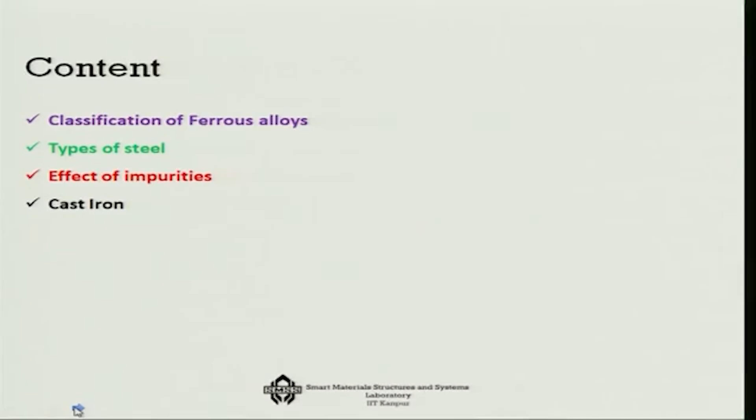Good morning, students. Fortified by the knowledge of crystal structure, now we will start our journey with some materials which show regular crystal structure. We have first chosen the metals in this journey, and among the metals, we are going to first talk about iron and iron alloys. So in this lecture I am going to talk about classification of ferrous alloys, various types of steels, the effect of impurities, and also another iron based alloy which is a composite, not exactly an alloy, which is cast iron. These are the things we are planning to discuss today.

When we talk about metallic alloys, there are two basic classifications. One is the ferrous group, where the base metal is iron, and another is the non-ferrous group, where the base metal can be anything like aluminum, copper, zinc, nickel, titanium, and their alloys. Iron based alloys are much more extensive in terms of use, and have been in use for a very long time. If you remember, I showed you the evolution of materials where iron came first and still has a very large base, mostly because iron is quite abundant on earth. But interestingly, aluminum is more abundant than iron. The problem is that extracting aluminum is a high energy procedure, so energy intensive to get aluminum from the earth's crust, that is why it is relatively less popular than iron and relatively more expensive, even though aluminum is much more abundant in the earth's crust.

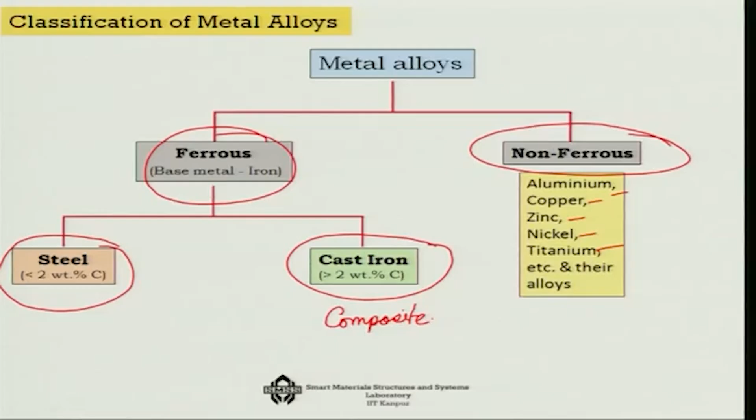Now, in terms of iron based different types of alloys or composites, the broad two things we can say is steel as one of the alloys, and cast iron. I would not exactly call cast iron an alloy, but rather a composite. The logic behind that I will explain when I talk about composites. Basically, in a composite the constituents remain in a distinct phase separation state, they do not chemically get interlinked with each other. That is what happens when the percentage of carbon is so high in a system like iron, that carbon starts to precipitate and they form a composite. On the other hand, steel is a kind of mixing where the carbon atoms penetrate inside the iron crystal structure, and thus not only carbon but similar impurities actually form the alloys.

The journey with iron, as I told you earlier, began about 3000 years ago and it is still continuing today. One of the most important alloying materials in iron is carbon, which forms an interstitial solid solution. What is this interstitial solid solution? First, solid solutions mean both the solute and the solvent are at the solid state itself, in this case the iron and the carbon. Then how do you get the solution? The carbon atoms, which have atomic radius of about 0.071 nanometer, are much smaller than the iron atom, which is about 0.124 nanometer. Now, if you consider an iron crystal structure where these atoms are bigger in size, consider these three atoms, then the space created in between is easily suitable for one carbon atom, and that is the interstitial space.

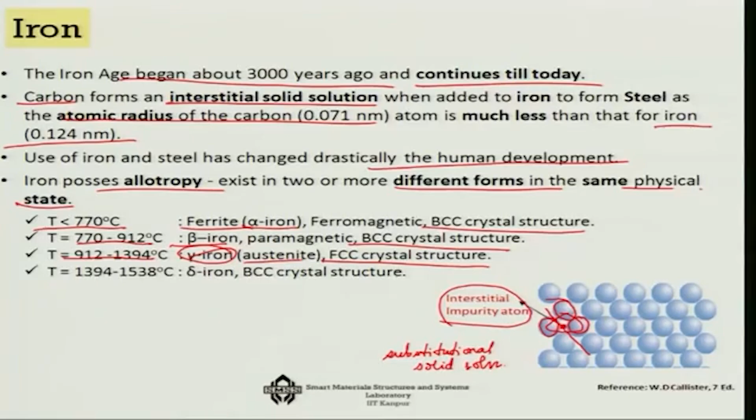If you go from 912 to about 1394, you will get another version which is known as the gamma iron, and this is not BCC anymore, it has an FCC crystal structure, which is also called austenite crystal structure. Again, beyond 1394 to 1538, you get another iron crystal structure in another phase of iron, which is delta iron, and it has a BCC crystal structure.

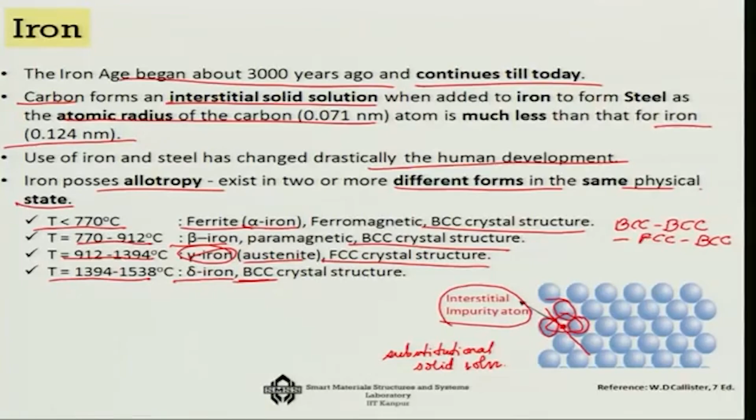So where are we? We start from BCC. Again, at a higher temperature we have BCC, but ferromagnetic to paramagnetic. Then from BCC we go to FCC, and at an even higher temperature we go back to BCC. That is how the alpha, beta, gamma, delta iron phases and the allotropies of iron are actually distributed.

Now, the penetration of carbon, as I told you, into iron had a very significant economic effect. If you look at the crude steel production over the roughly 65 years between 1950 to 2015, from the World Steel Association report of 2016, you would see that about 1621 million tons for 2015, about 50% is from China.

The rest is from the rest of the world, so that is what you can see in this picture: China is there, Japan is there, and other Asian countries are there. Of course, India, from the single biggest player point of view, India has many very good steel makers today in the Indian context. So as you can see, even though there are some ups and downs, by and large this curve is always increasing in terms of million tons of steel per annum.

In fact, we always say that the growth of an economy is very much depicted by the production of iron and steel. So that is something you can see, that is how it is happening.

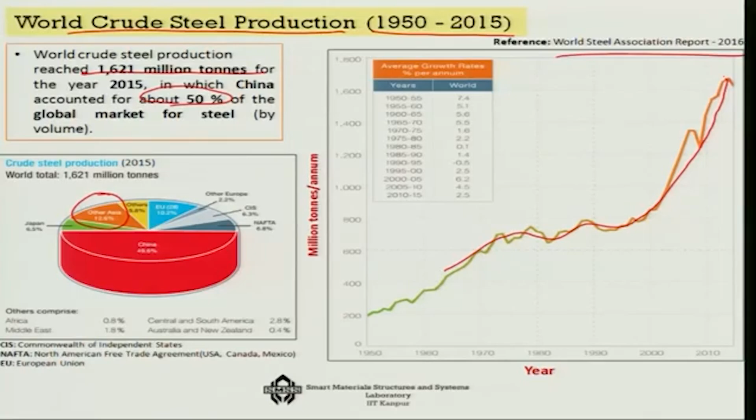In fact, if you look at the picture country-wise, you would see that some of the highest developing countries like China has 803.8 million tons per annum steel production capability, Japan 105.2, and India is number 3 with 89.4. United States is lower than that at 78.8, then Russia, South Korea, Germany, Brazil, Turkey, etc.

In terms of companies also, there is one company which is at the top of the list, Arcelor and Mittal together, where there is an Indian contribution, that is 97.14 million tons. And also if you look at number 10, Tata Steel Group at 26.31 million tons, or SAIL or Jindal, we really have world presence in terms of million tons of steel per annum production.

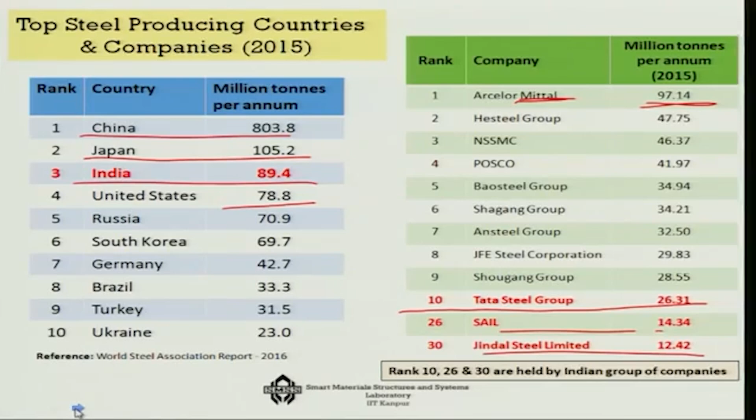So that is why steel is one of the very important materials for our economy. Now, steel we know is a solid solution which has interstitial carbon present in it, but the presence of carbon is smaller, less than 2 weight%. If it becomes more, then we go to the cast iron phase.

So if it is less, then we get steel, but even that itself has many variations. For example, depending on the presence of other alloying elements, if there are less than 10 weight% of other alloying elements, then this carbon and other element composition will make you the low alloy steel. If it is greater than 10 weight%, then we are going to get the high alloy steel.

Now, among the low alloy steel itself, there are 3 different types. One is the low carbon steel, which has less than 0.25 weight% of carbon, then medium 0.25 to 0.6, and high carbon steel 0.6 to 1.4%. Among the high alloy steel, which has greater than 10 weight% of alloying elements, again there are 2 subgroups, one for the tool steel and another for the stainless steel.

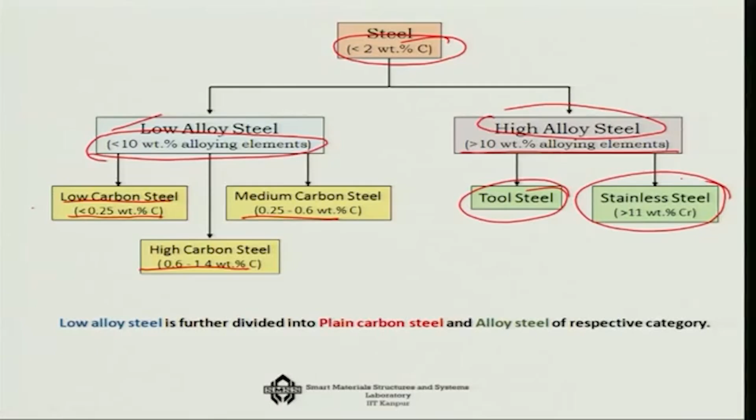Now, stainless steel is very distinctly classified because of the presence of chromium in it.

In fact, greater than 11% presence of chromium gives steel the quality that it will not get corroded very easily at all, and that is how stainless steel gets its name.

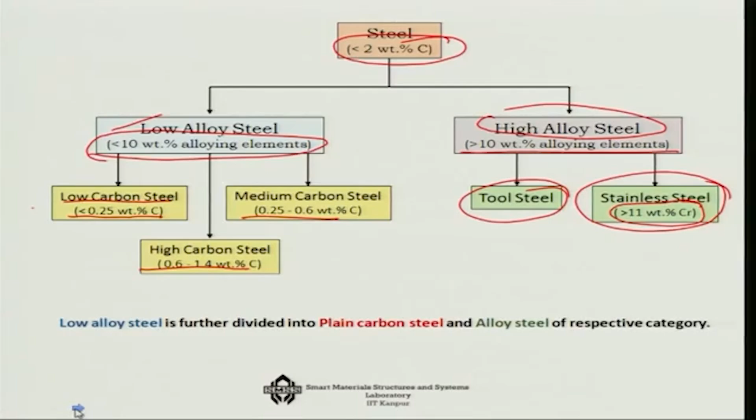Now, when we talk about plain carbon steel, which is one of these low alloy steels, what do we mean by it? There is an AISI definition stating that if you do not specify the minimum content of materials like chromium, cobalt, molybdenum, nickel, titanium, tungsten, vanadium, zirconium, etc., to be added to obtain a desired effect, that would be one qualifying point for plain carbon steel.

Again, copper should not be more than 0.4%. The maximum content is restricted for manganese to 1.65%, silicon to 0.6%, and copper to 0.6%. So copper must be within a range of 0.4 to 0.6%, manganese should not be more than 1.65 weight%, and silicon should not be more than 0.6 weight%. The rest of the materials should be present, but the minimum content is not specified. In such cases, we consider these to be plain carbon steel.

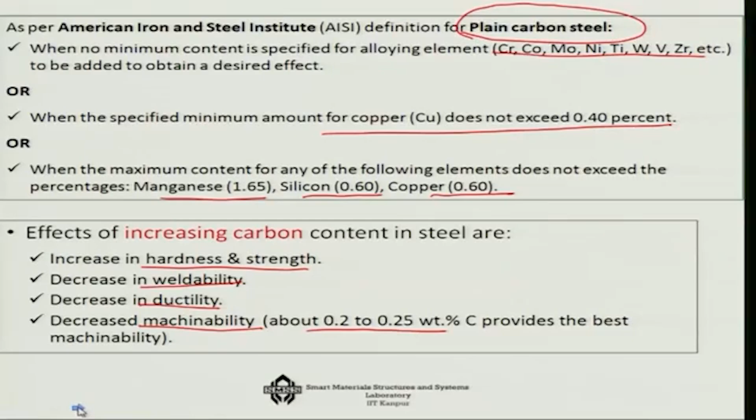So there is a trade-off, which guides us towards exactly how much is good enough for a particular product. The most versatile among steels is low carbon steel, which contains less than about 0.25% carbon. Because the carbon percentage is low, it is relatively soft and also weak.

It has ductility of about 25% and good toughness. It also has good machinability and weldability, and is less expensive to produce. Its tensile strength is of the order of 415 to 550 megapascal. Low carbon steel is used for general applications where strength is not of high demand, and this is generally known as mild steel.

There is a version called low alloy steel, which gives better strength, up to 700 MPa, and in this you get more alloying elements, for example copper, vanadium, nickel, molybdenum up to 10%. More than that it becomes high alloy steel. This low alloy steel has better tensile strength and many structural applications like beams, channels, nuts and bolts, wires, tin cans, etc.

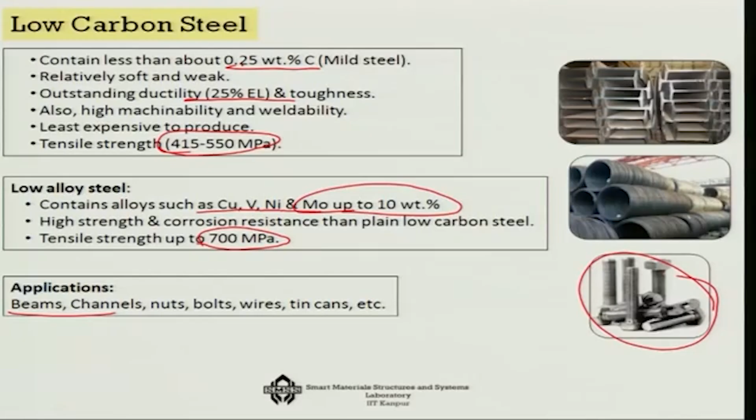So that is about low carbon steel. Now, if the carbon content increases a little more, to 0.25 to 0.6%, we get medium carbon steel. These are stronger than low carbon steel, so strength has increased, but with lower ductility and toughness.

You have sacrificed in terms of ductility, but it has good wear resistance; strength has increased, with tensile strength up to 850 megapascal for plain carbon, and if alloyed further you can go up to 1900 megapascal. No wonder it has heavy duty applications like railway wheels, tracks, gears, or crankshafts — wherever you need high tensile strength and toughness, that is what you get in medium carbon steel.

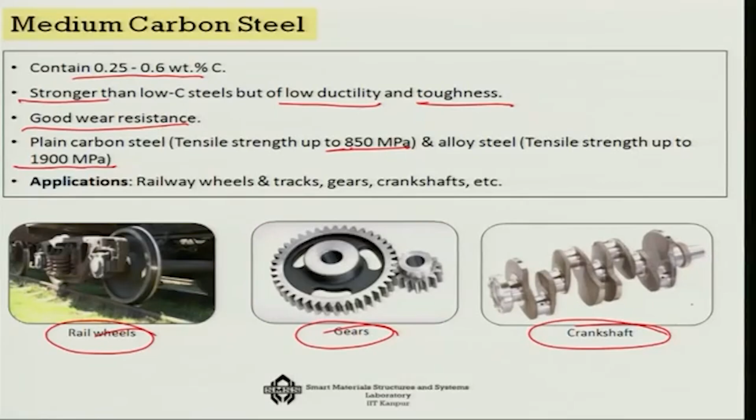Now, finally, if we increase the carbon further, from 0.6 to 1.4%, this is the hardest, strongest, but least ductile carbon steel. That is why it is generally used for dies, for example, or this type of application.

It can be further alloyed with carbon and other metals to form very hard and wear resistant material. If you alloy it with chromium, nickel, tungsten, molybdenum, or vanadium, you get something with better wear resistance, which can be used for cutting tools, embossing dies, saws, concrete drills — this type of high strength application.

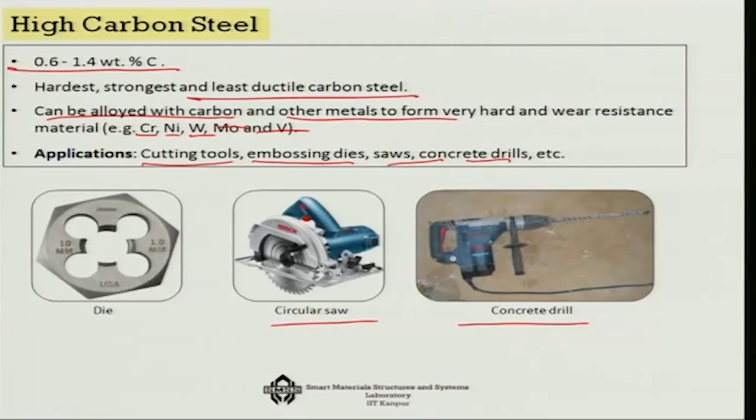Now, so far we kept our alloy percentage less than 10%. We only varied the carbon percentage, from low carbon to medium carbon to high carbon.

If the alloy percentage itself increases, goes to greater than 10%, for example for drill bits and other rotating cutting tools, you can withstand higher temperature without losing hardness and toughness. For example, the high speed steel like 18-4-1, that means it has 18% tungsten, 4% chromium, 1% vanadium, and a carbon content of about 0.6 to 0.7. So how much weight percent are we getting? Something like 18 plus 4, 22, 23... 23.7%, greater than 10 weight percent of alloys. You get a very good quality high alloy steel which can be used for tools.

Cobalt high speed steel is another example, used for increased heat resistance. Or molybdenum HSS, where the molybdenum will increase the hardness and wear resistance, and also become cost effective because you are replacing tungsten in the tool steel. So all these high alloy steels are mostly used as cutting tools and drill bits.

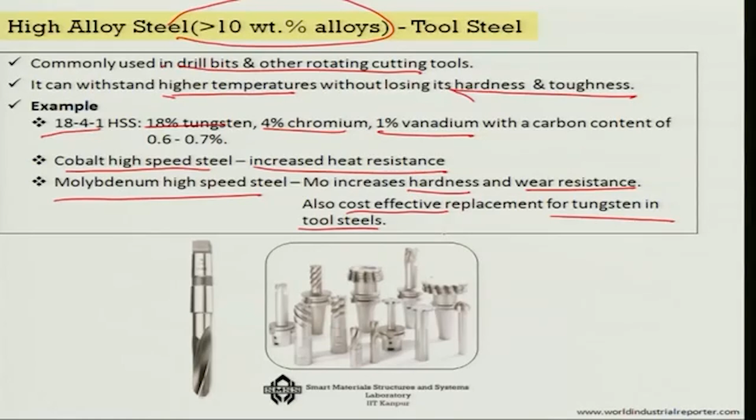Now there is another group of high alloy steel which also has greater than 10 weight percent of alloying material, but it has a single most important alloying material, that's why it's a separate class - chromium, at least 11 weight percent. The presence of chromium gives it high resistance to corrosion. For example, the 18 by 8 stainless steel has 18% chromium and 8% nickel, giving it very high resistance to corrosion.

That is why they are applied for applications like cryogenic vessels, food processing, gas turbines, high temperature steam boilers, heat treating furnaces, nuclear power generating units, and various other types of boilers. So that is about stainless steel.

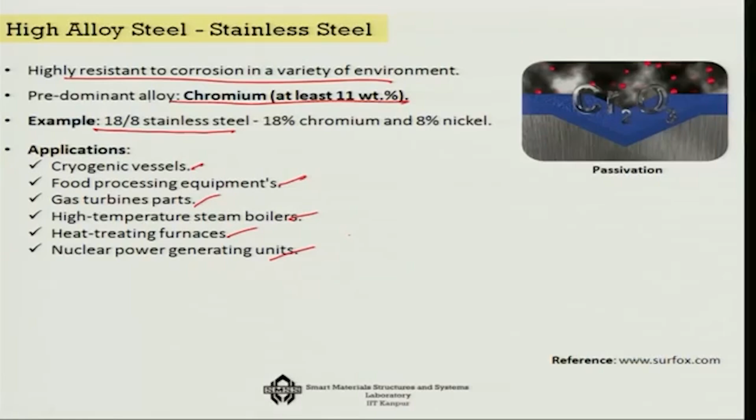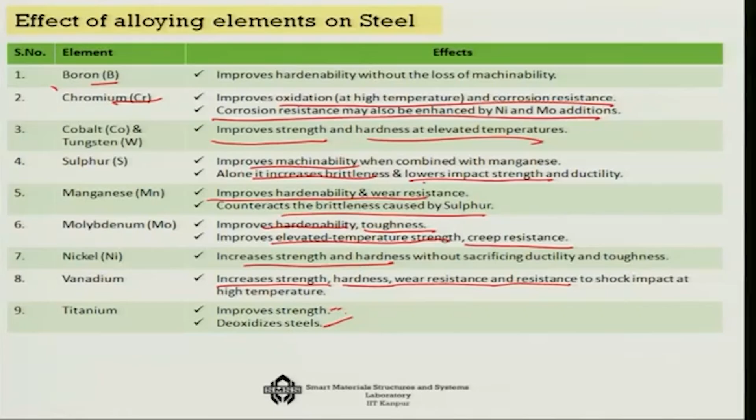So these are some of the contributions of the alloying elements into the properties of steel, which if we know, we should be able to give proper guidance in terms of steel alloy making.

Now suppose you have some property in mind, you can use this table - say hardenability. What is hardenability? It is a way to indicate a material's potential to be hardened by heat treatment. If I want to increase this hardenability through heat treatment, we should go for chromium, manganese, molybdenum and titanium, and then tungsten and vanadium. Particularly vanadium is very good in terms of increasing the material's potential to be hardened.

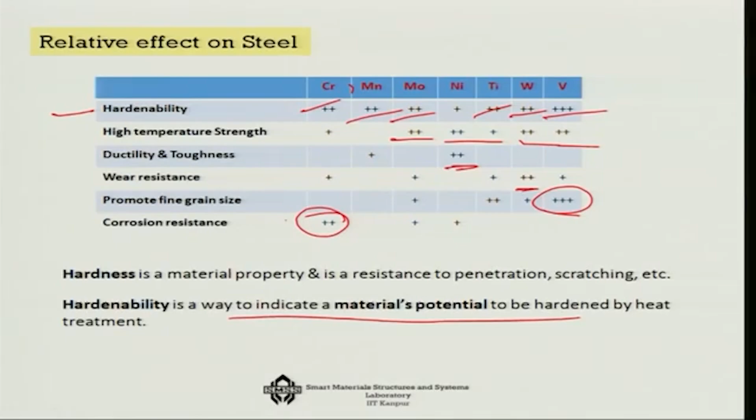If you talk about high temperature strength, then molybdenum alloy, nickel, tungsten, vanadium are actually very good. From ductility and toughness point of view, nickel is good. From wear resistance point of view, tungsten alloy is good, and to promote fine grain size, vanadium is good. From corrosion resistance point of view, chromium is good. So thus each one of these alloying materials has its unique contribution into the property of the steel alloys.

Finally, we are going to talk about cast iron, where the percentage of carbon is even more than what we have seen earlier in mild steels, etc., that is greater than 2 weight% carbon. That is the cast iron system we are talking about. Now, there are quite a few variations of cast iron.

The first one we should see from a vibration application point of view, I liked it, is the grey cast iron. It has a carbon content which varies from 2.5 to 4%, and here the graphite, remember this is a high carbon content we are talking about, exists actually in the form of flakes, as you can see. These graphite flakes give it excellent self-lubricating and vibration damping capability.

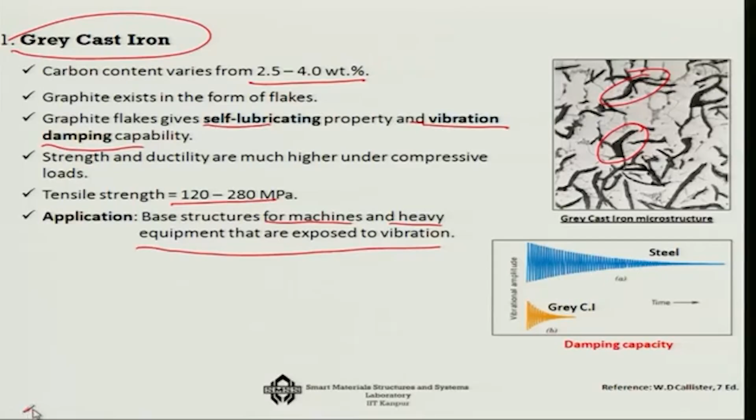The strength and ductility are much higher under compressive loads, and the tensile strength is somewhere between 120 to 280 megapascal. This is being applied in structures like machine foundations or heavy equipment exposed to vibration. In all these cases, grey cast iron is definitely one of the most popular choices.

Then the other variation we have is called white or chilled cast iron. In this, no graphite formation takes place; carbon remains in the form of carbide. It is generally formed by rapid cooling of molten iron, is very hard, wear and corrosion resistant, almost non-machinable, and its application is something like rollers in rolling mills.

Then there is malleable cast iron, which is formed by heating white or chilled cast iron between 800 to 900 degree centigrade for a prolonged time in a neutral atmosphere to prevent oxidation, which leads to decomposition of the cementite, forming graphite in the form of clusters.

These are highly shock resistant, with tensile strength between 350 to 450 megapascal. It can be hammered also to small thickness, and is used typically for connecting rods or transmission gears and differential cases in the automotive industry, and flanges, pipe fittings and valve parts.

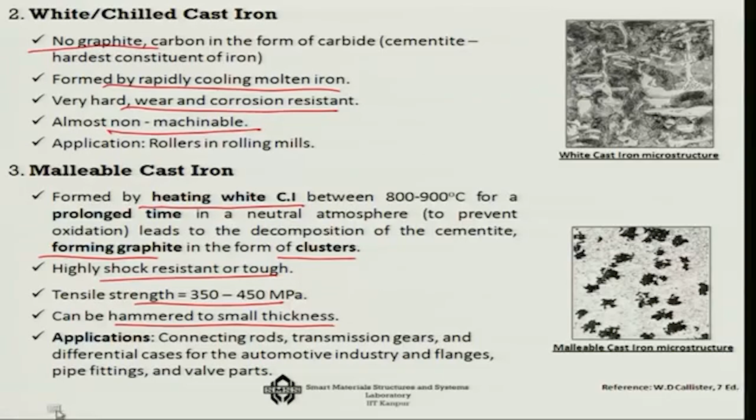It has high fluidity and high tensile strength. It is tough and wear resistant, with good machinability and weldability, and it is designated as SG 900/2, representing tensile strength and percentage elongation.

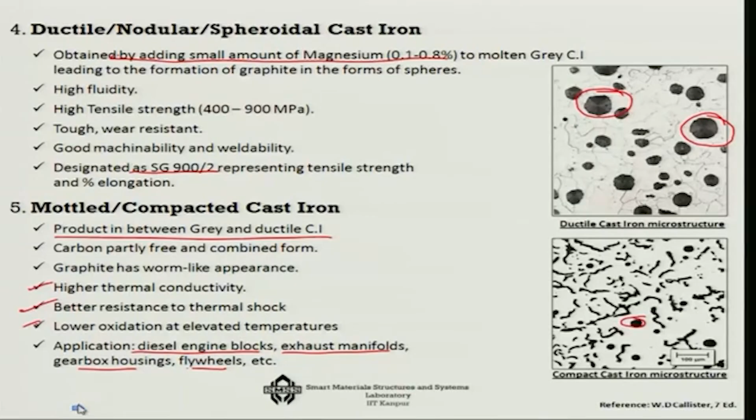Now, the effect of impurities on cast iron: suppose if I add silicon as an impurity, it favors the formation of free graphite, makes iron soft and easily machinable, and provides sound casting free from blowholes, as it has high affinity to oxygen.

If I add sulfur, the cast iron becomes hard and brittle, and above 0.1% it gives very unsound casting, so we should not add too much sulfur. If I add manganese, it makes it hard by formation of carbide, but it keeps control over the harmful effects of sulfur.

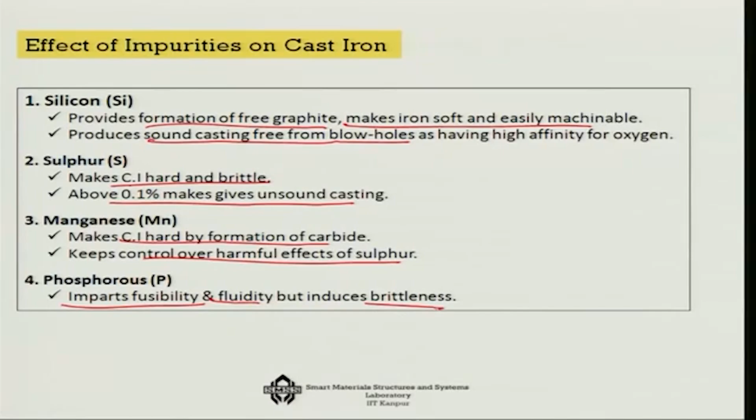If I take phosphorus, it imparts fusibility and fluidity, but it also induces brittleness, so we have to add it in a very limited manner.

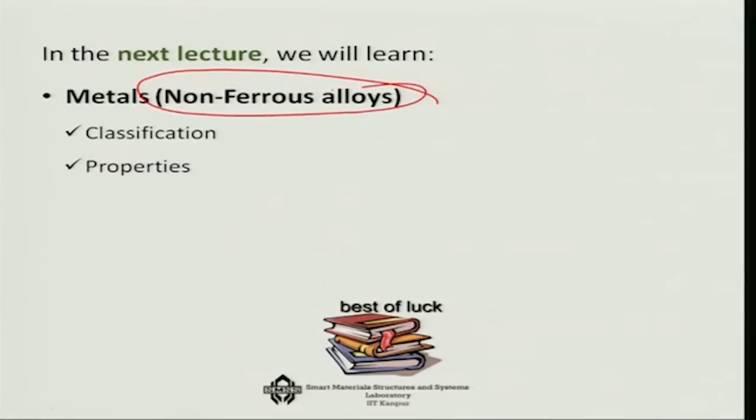Now, this is where we will complete our journey of the iron based alloys. In the next lecture, we will talk about non-ferrous alloys, their classification and their properties. Thank you.